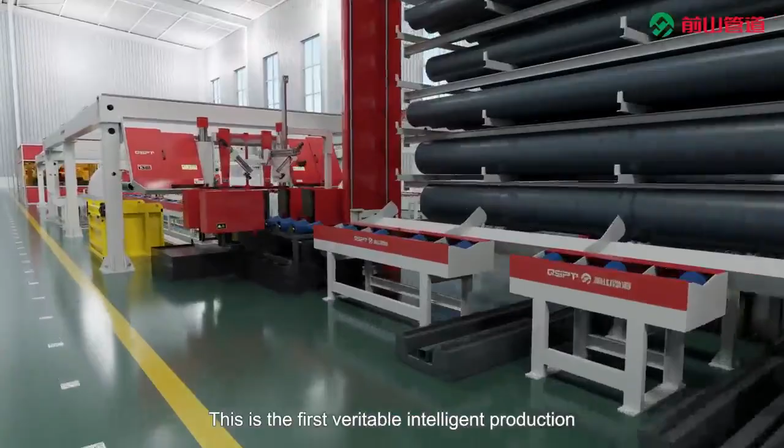Modular intelligent production line for pipe fabrication, elaborately produced by CCIE and GSPT. This is the first veritable intelligent production line for pipe fabrication. The intelligent production line has originality and demonstration in the industry.

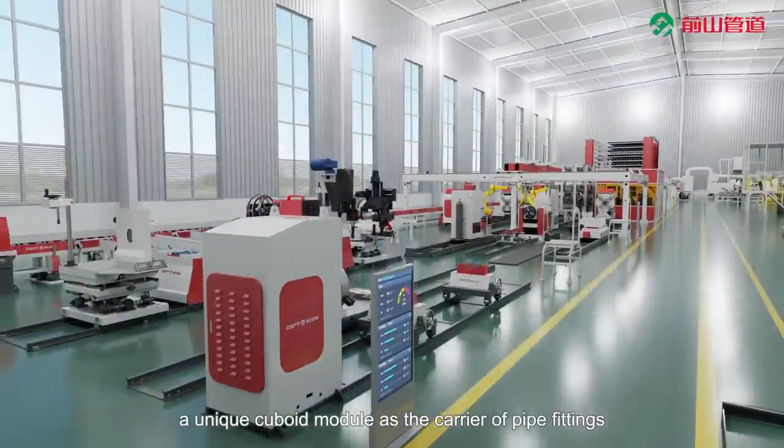The intelligent production line uses a unique cuboid module as the carrier of pipe fittings, thus realizing intelligent storage of pipe fittings, intelligent fitting up of pipe spools, intelligent welding of weld joints, and even assisting in intelligent flaw detection of weld joints.

Fully and semi-intelligent solutions are optional for pipe fabrication. Fully intelligent solution for pipe fabrication: intelligent pipe fabrication of the whole process by using modules or pallets as pipe carriers. Semi-intelligent solution for pipe fabrication: intelligentize core processes of pipe fabrication by code scanning and program calling.

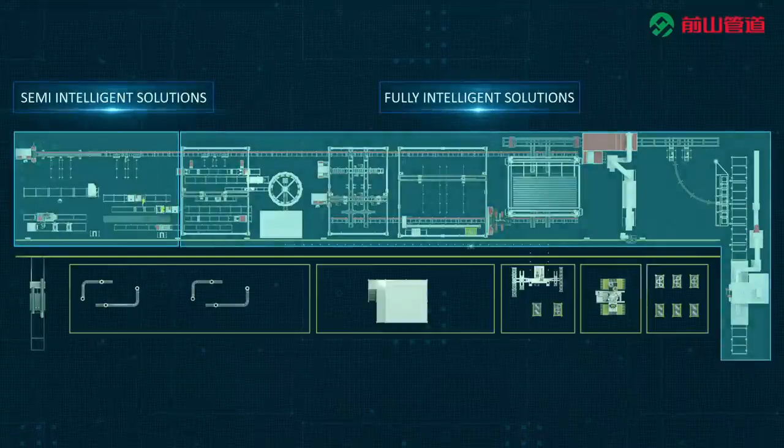The intelligent production line is composed of 6 controlling levels. The FL, PLC, ICS, and IMS are jointly developed by both parties. The MES and ERP are standard configurations already installed by CCIE. This intelligent production line for pipe fabrication is composed of 6 major systems and a central controlling room.

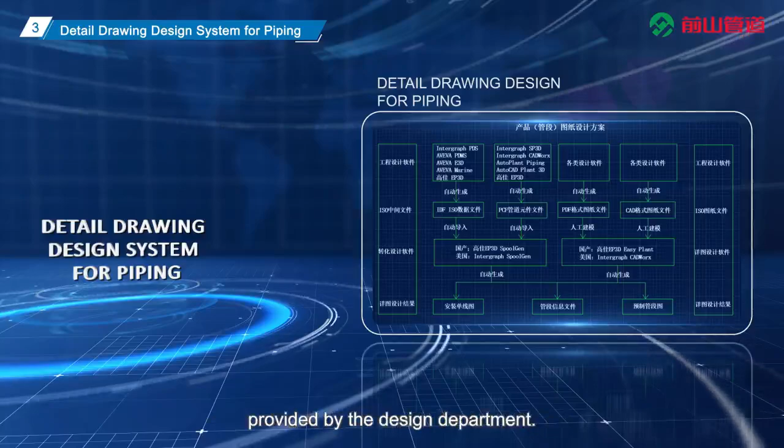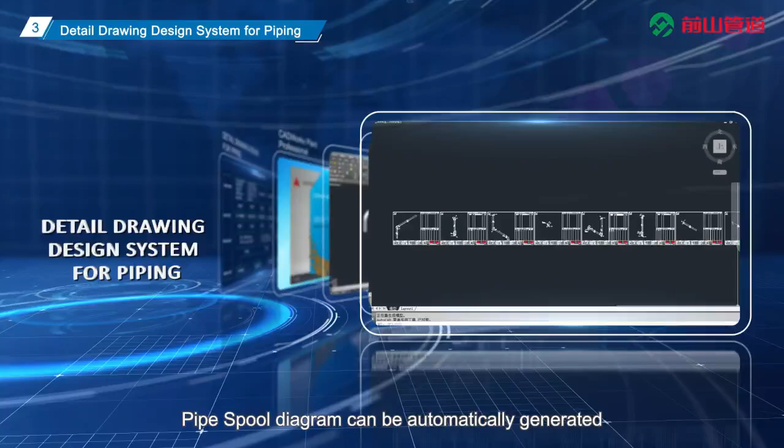DDS. The pipe fabrication production line produces pipe spools. The detailed drawing design for piping is specific to pipe spools. The product drawing design scheme varies depending on the format of the drawing files provided by the design department. CADWorx can manually create 3D pipe models based on pipe grades. After specifying the on-site port, the installation single line diagram and fabricated pipe spool diagram can be automatically generated, and the pipe information files can be exported.

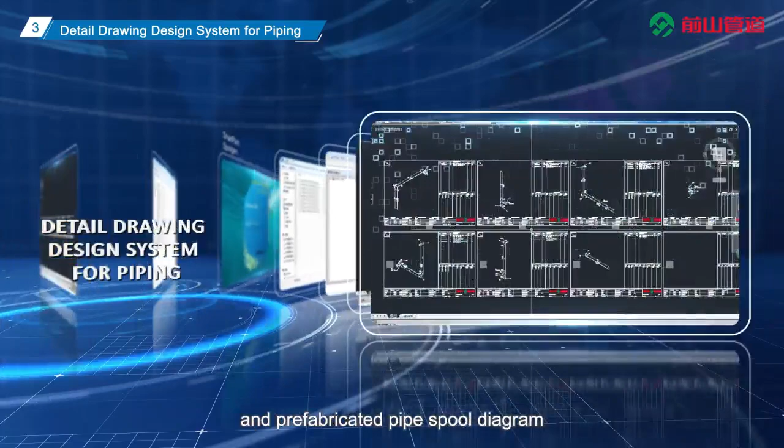SpoolGen can automatically generate a 3D pipeline model on the basis of inputting PCF and IDF intermediate files. After specifying the field welding joint, SpoolGen can automatically generate the installation isometric diagram and prefabricated pipe spool diagram and output the piping information file.

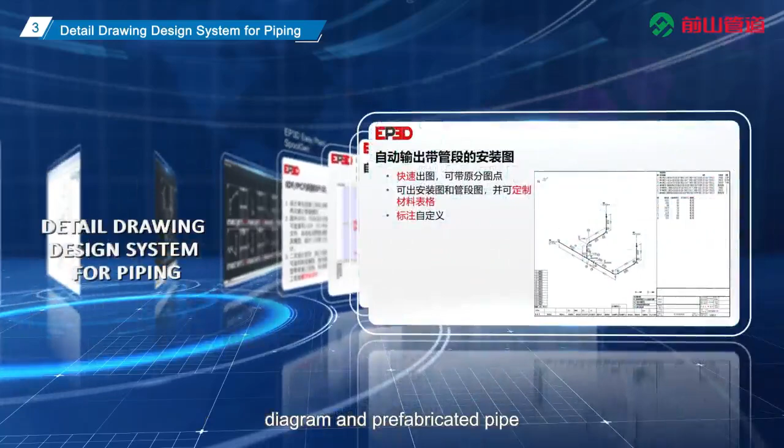EP3D can manually create 3D pipe models based on pipe grades, or automatically generate 3D pipe models after importing PCF and IDF intermediate files. After specifying the field welding joint, the installation single line diagram and prefabricated pipe spool diagram can be automatically generated, and the pipe information files can be outputted.

IMS. The Intelligent Management System for Production Line, IMS, is deployed inside the server of the central controlling room. It can match drawings and materials, and lock the inventory materials based on the imported drawing information and the received material information. It can make working packages based on MES planning requirements and matching results of drawings and materials, that is, production line scheduling.

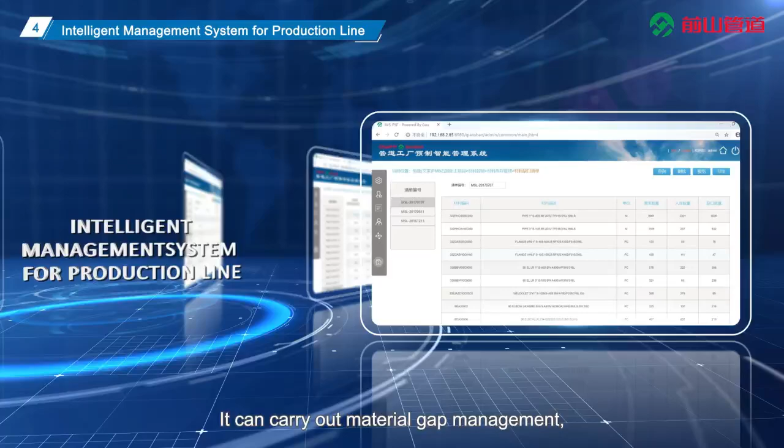It can arrange material layout for pipe cutting based on the material cutting list and the pipe materials in 3D storage as shown in the working package. It can carry out material gap management, fabricated quantity management, and traceability management during the production process. It can perform production process management by sending work orders to the control system and receiving feedback from the control system.

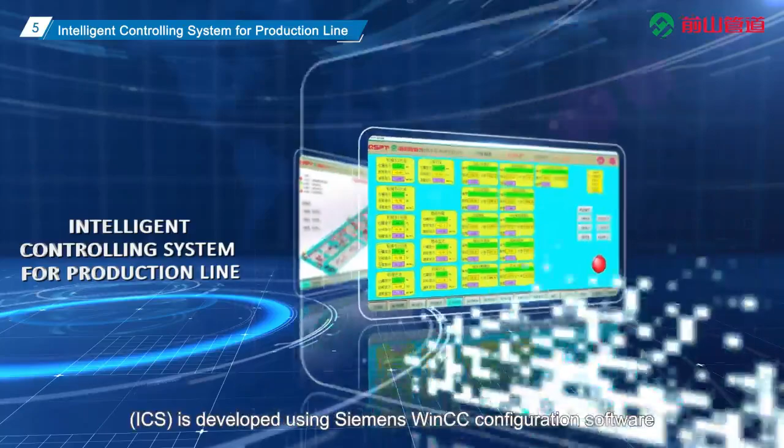ICS. The Intelligent Controlling System for Production Line, ICS, is developed using Siemens WinCC configuration software and deployed inside the IPC of the central controlling room. It coordinates the PLC systems of the production line and commands them to complete corresponding actions. It conducts real-time data collection, data analysis and reporting, equipment process monitoring, equipment abnormality alarm, and visual display.

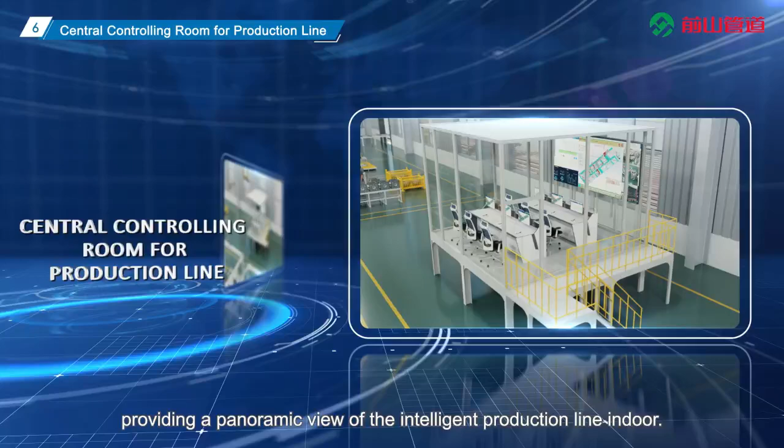Central controlling room for production line. The central controlling room, CCR, is located in an elevated transparent glass room, providing a panoramic view of the intelligent production line indoors. The CCR is equipped with an LCD video wall, a control console, a weak current cabinet, air conditioner, etc. The weak current cabinet comes with a server, an IPC, a monitoring host, etc.